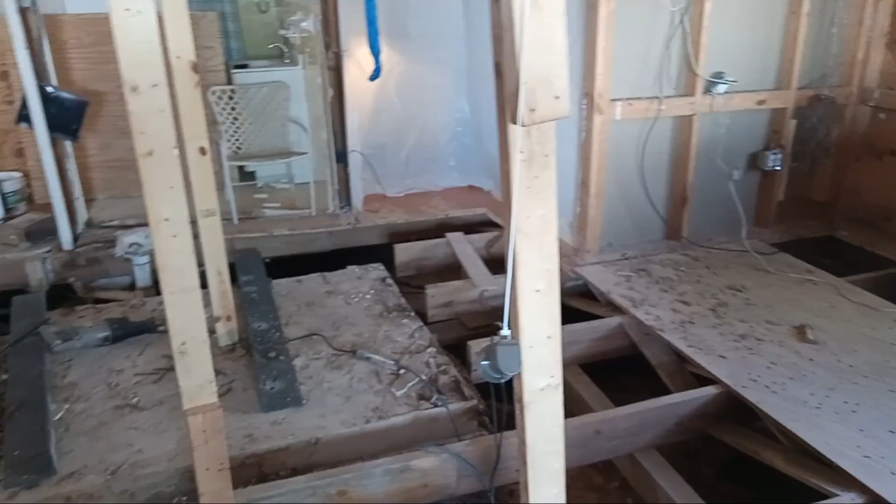All right, so I'm here in this disaster area still, and it's not going to get done until I do it. So come on, Parker, get to work. So I'll be here for 4 days. Yesterday I spent doing yard work because we were gone for so long and there was just a lot of stuff to take care of.

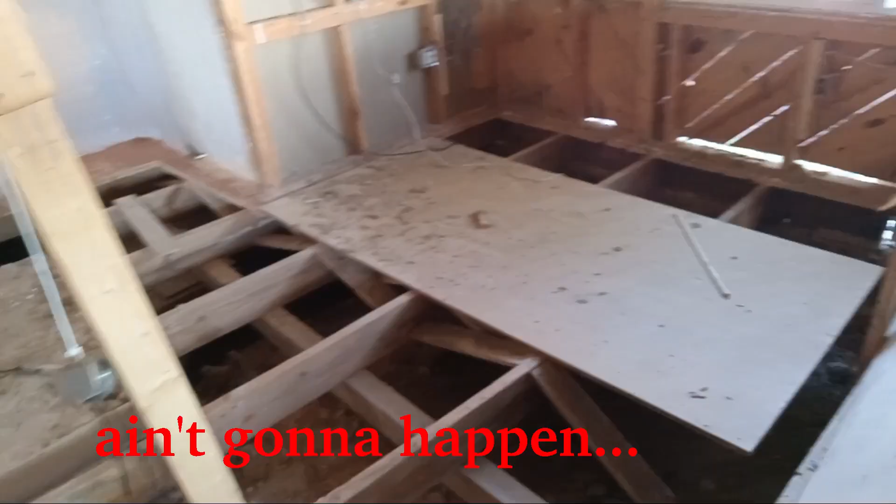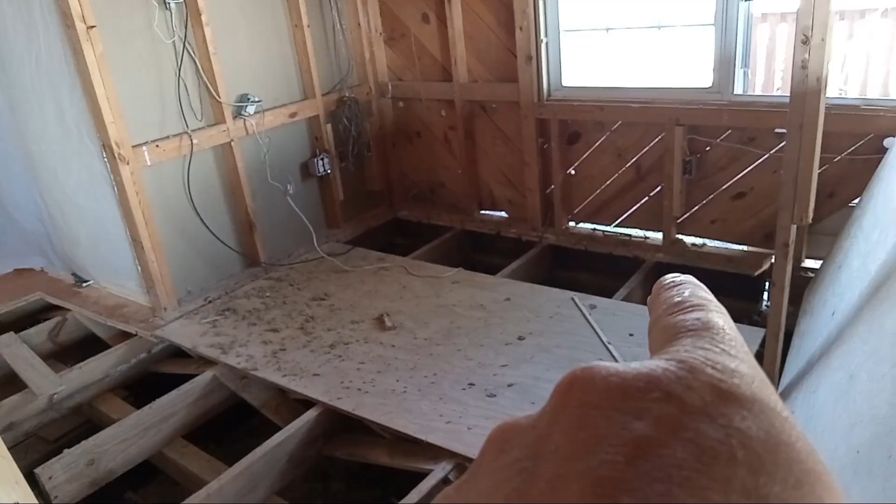So the goal for this week is to get all this structure done and get it inspected. So today I'm going to focus on getting this wall removed. Take out this rim joist and sill. Pour in some concrete, some of the cells, and put in bolts and get that curing overnight.

There's water underneath that part of the bath or the closet. Just FYI, there's also water, tons of water underneath that floor there and in that other floor over there. This is dry, thank goodness, so I can work in there.

After I do that guy, then I've got the short task of jacking up this joist and sticking in some insulation under there, some foam to prevent moisture from coming up through the bricks into the wood. This is not pressure treated sill right here. And then I'll bolt that down, and then those two boards I'll lay against that joist and secure those in place. So that structure will be done.

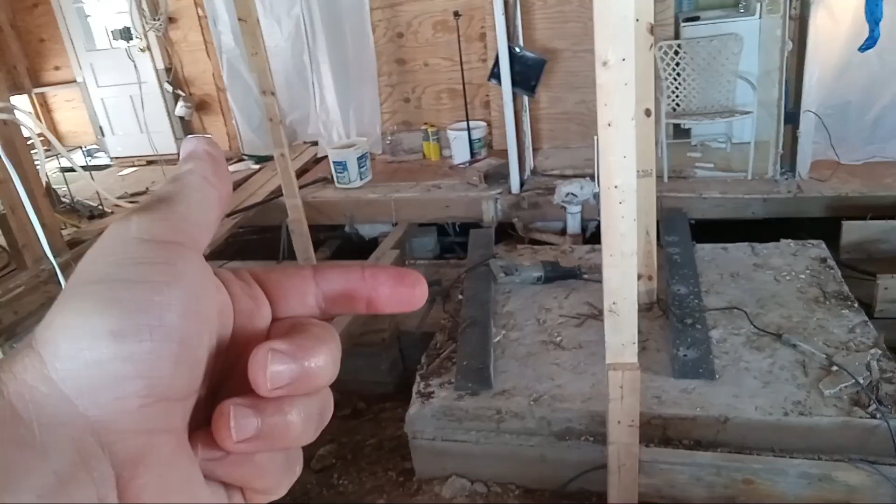Then mounting these L brackets on the side of the chimney. The strategy will be to epoxy them in place and then drill, because the drill is going to wander, and I want to kind of force it into the right location. So I'm just going to epoxy those guys in place and hope that holds just while I'm drilling. And then Simpson Titen bolts go in to hold that. There's 4 on each L bracket.

Then I need to figure out if I need to do any additional pressure plumbing under here. I'm not sure I need to. I can address that when I raise that kitchen floor, because it's mostly under the kitchen floor. But some plumbing needs to go through one of these bays and begin to go up the wall on the outside. So I'll address that.

This job here is probably only a couple hours long. Putting these guys in is probably half a day. And then I've got to let that epoxy cure and drill the holes, bolt that together, and then start laying. And while that epoxy's curing, I can lay some of these joists in here. I can clean up the debris in here, lay joists, and yeah. Then when the epoxy's cured, I can finish all the joists going across, put in the post, put knees around the post, and secure all that. Yeah, and that's it.

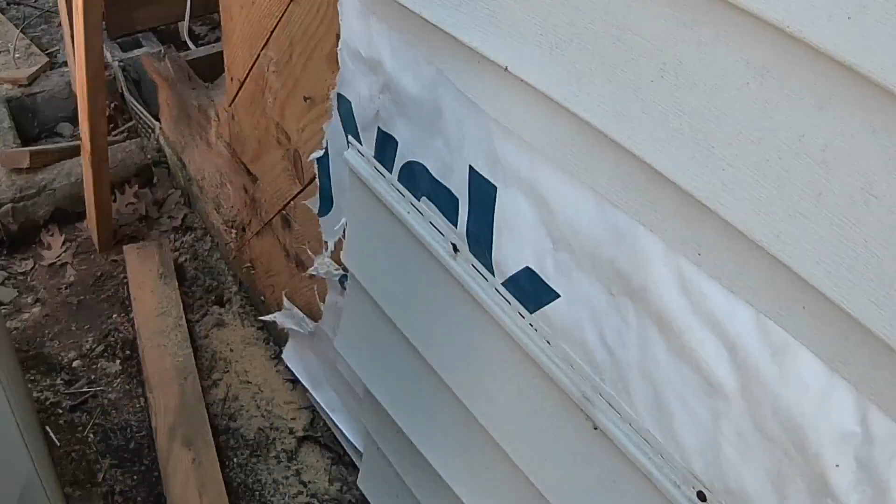I got that part torn apart. I've ordered a new vent to go in there. Should come tomorrow. There was still some termite damage here. So I'm going to tear apart this part all along here for about 6 feet and see how far that termite damage continues.

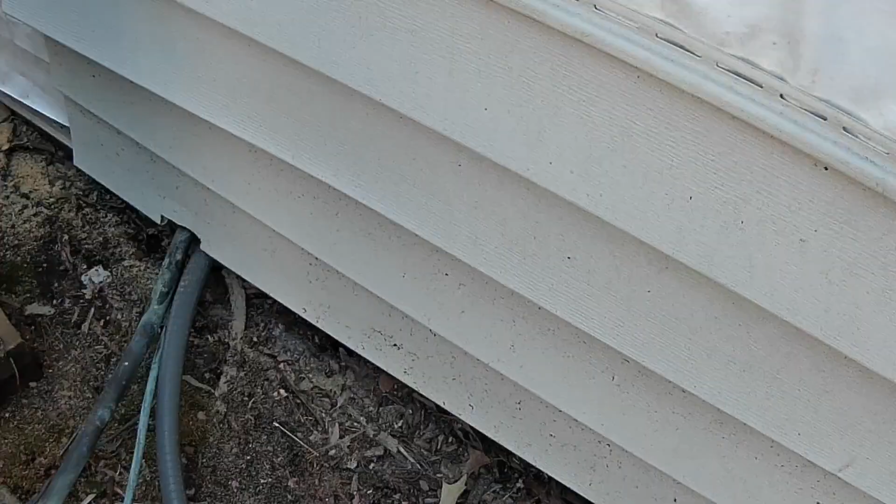I can jack the house up from below, aside from the water that's over in this region in here. I could conceivably eventually replace all of the band boards outside and the sill plates just by jacking up the house 1/8 of an inch, each wall, and then prying out the wood, putting in a new piece of wood. And it's possible. It's a pain in the rear, but you know what, while I'm at it, it'll make the house last for a very long time. So I'm going to see how long this termite damage goes and see what to do.

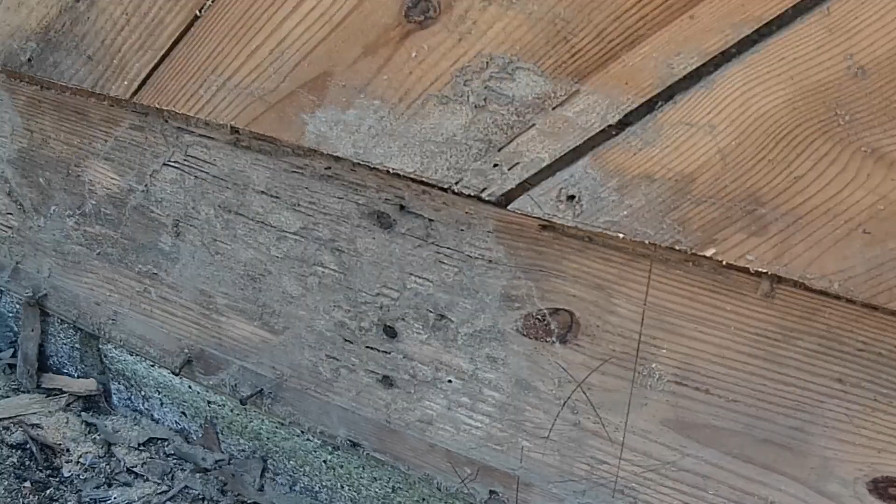All right, so after tearing off some of this sheathing, this area right here actually looks really good, but to the right has some termite damage, and to the left has lots of termite damage going down. So number one, this stuff is dry as a bone, so there's no active termites here. The sill plate, and actually the sill plate going down that way, actually looked pretty good also.

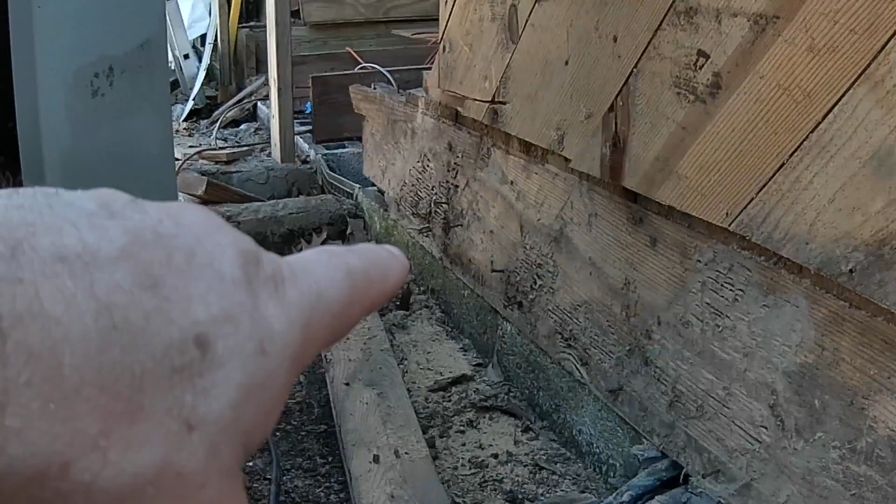It actually didn't have any termites in it, the sill plate. This sill plate here does look like it's got some termite damage, but over here it doesn't. And now, of course, termites will stop short of the surface of the wood, usually. But in this case, there's a little bit of a ledge here, and they still ate to the surface. So, anyway.

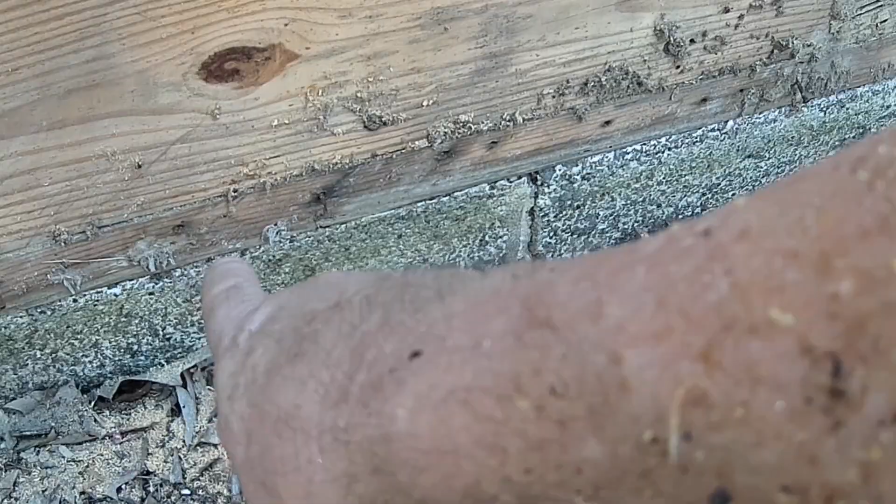So because this is dry as a bone, and I'm going to be sealing it up, I'm going to be jacking up the joist a little bit so I can shove some foam under here. Not spray foam, but foam that's meant to go under a sill plate. Roll foam.

I'm going to cut the band joist here and the sill there, and I'm going to replace all that with pressure treated, and this with pressure treated. This joist right here is going to remain, and so is that one, and the one down there at the end of this hole, that remains.

So I'll remove the nails here and cut down the middle of the band board here, and then pry it out. Cut here, take out the sill, and then I'll pour a couple cells worth of concrete in here with bolts, and I'm gonna maybe call that a day, because I can't do anything with the bolts until they harden. So anyway, we'll see how that goes.

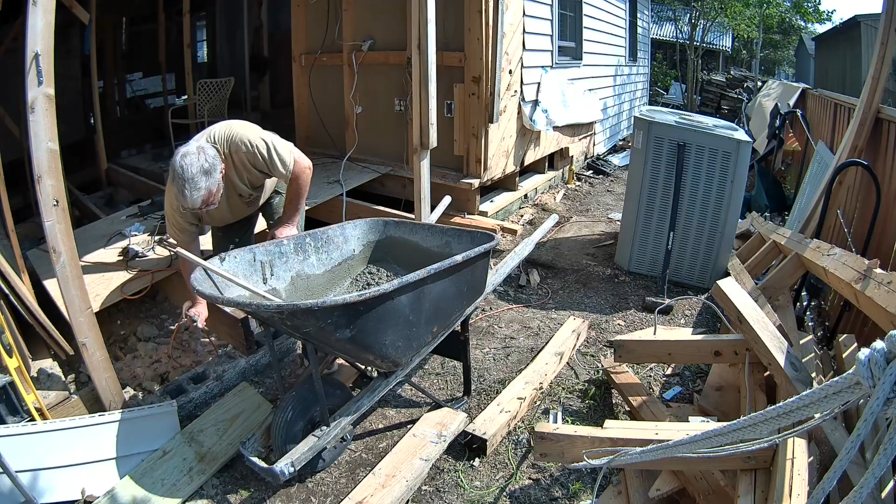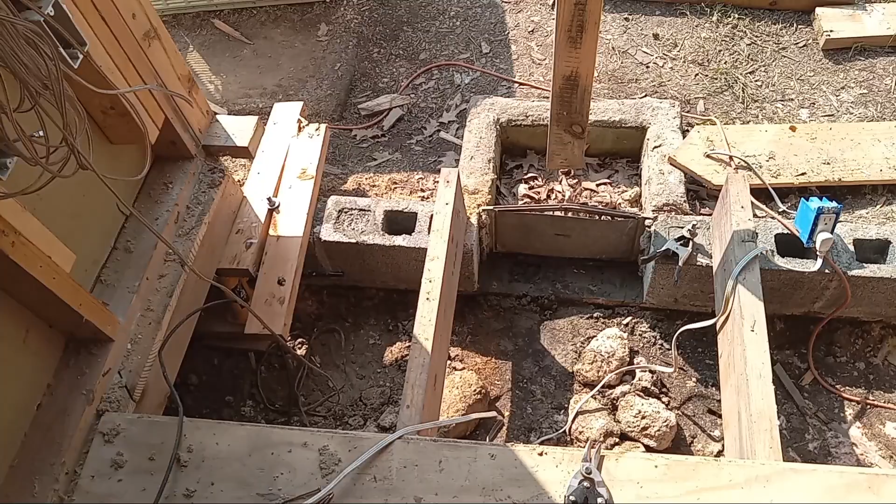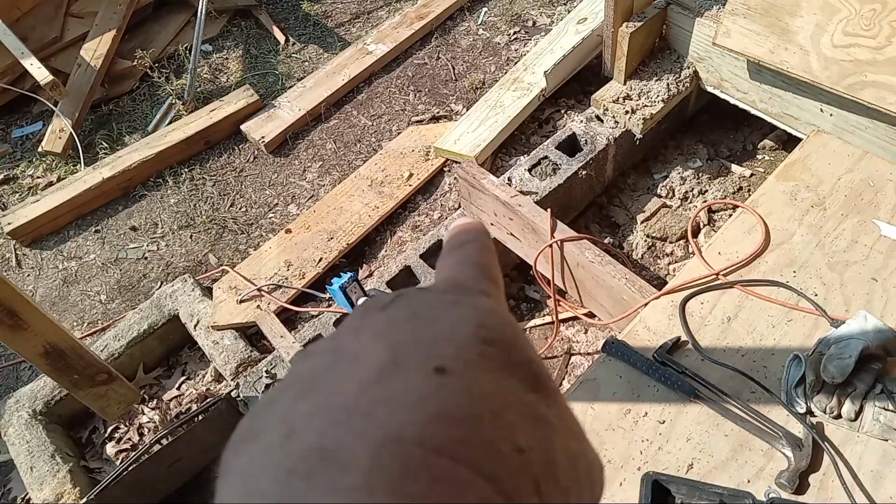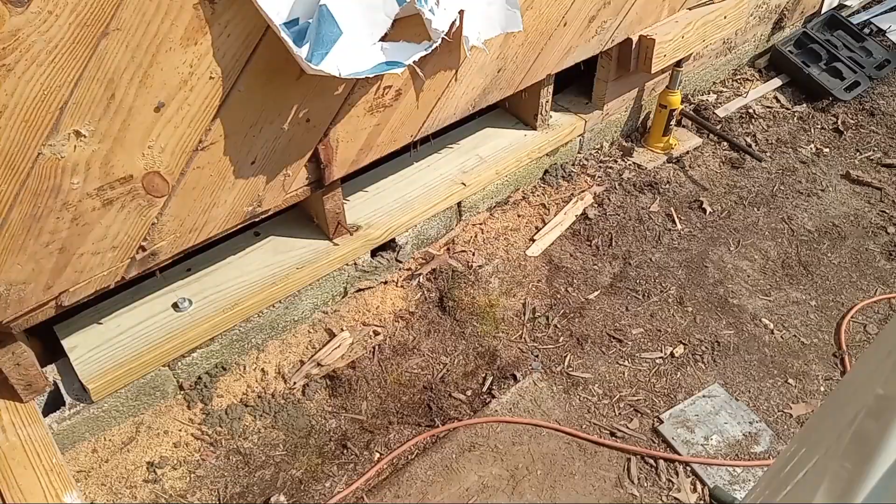So in this case, I don't feel so bad. I didn't put a foam pad under it because I've got these existing joists here that are pressing down. I didn't want to risk screwing it up and not doing a good job. So it's pressure treated. The non-pressure treated sills that I pulled up didn't show any water damage or rot or anything like that underneath. You couldn't even see where the sills were. So I'm confident that these aren't going to rot based on moisture.

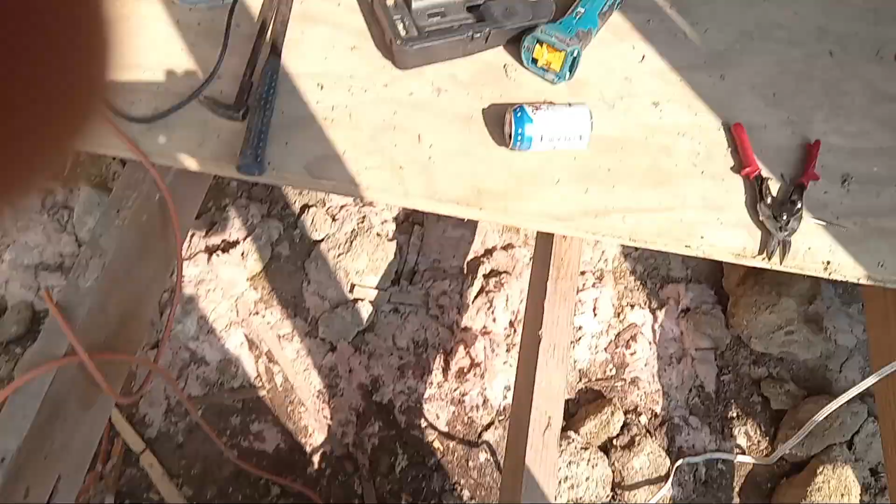So yeah, next step is to clean this crap up and start cleaning out the debris from the crawl space. Tomorrow, I'm supposed to receive another vent here. I'll put that in and then put the sill plate down, put in band boards, and then start putting in joists. Yeah, I can't put in joists until I put in the brackets. But that'll be tomorrow, hopefully.

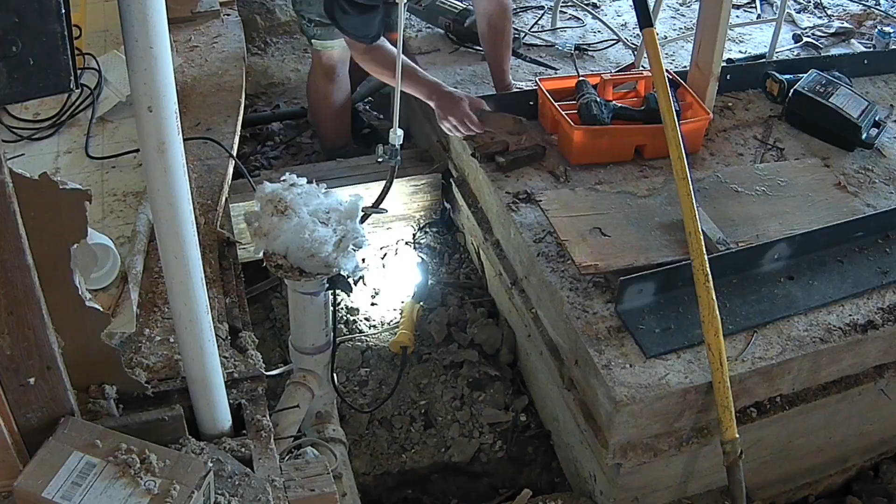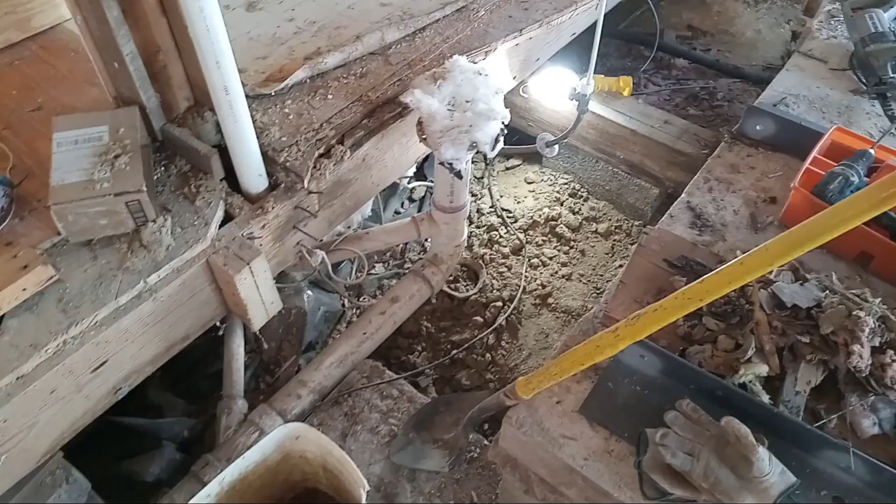All right, so last night I had an aha moment that I forgot to consider the toilet drain. The toilet drain needs to slide that way, at least an inch or 2, to be 15 inches from the finished wall. Which means I have to cut and refit this structure here and the vent. This vent can't be here because that's where the electrical panel goes. So the vent is going to move to the wall of the bathroom facing the river.

And so I've got to lay out on the floor. I've got to put some plywood here so that I can exactly measure where the ends of the beams are. That dictates where the wall goes, or the wall bumps out a little bit if the ends of the beams are too far toward the street, etc. So I've got to do some lofting.

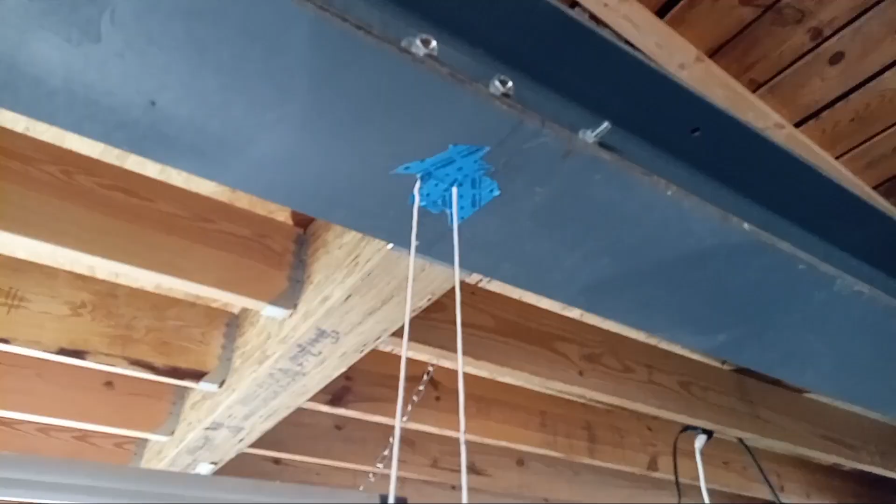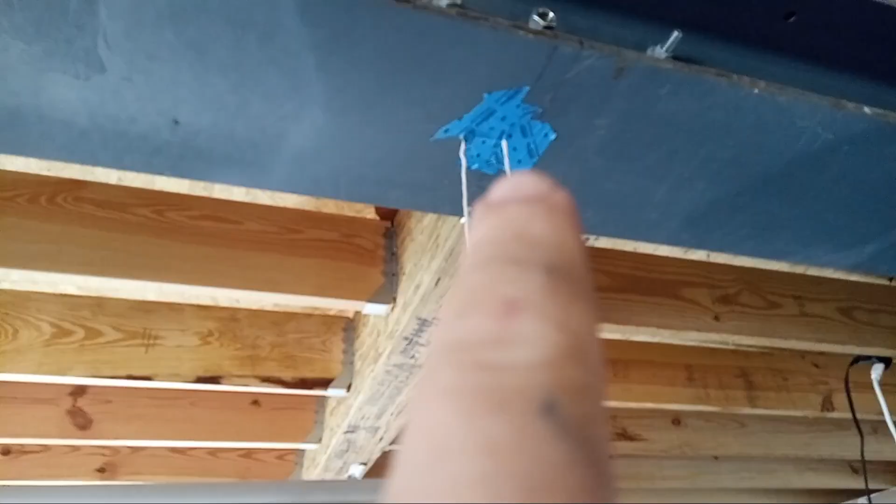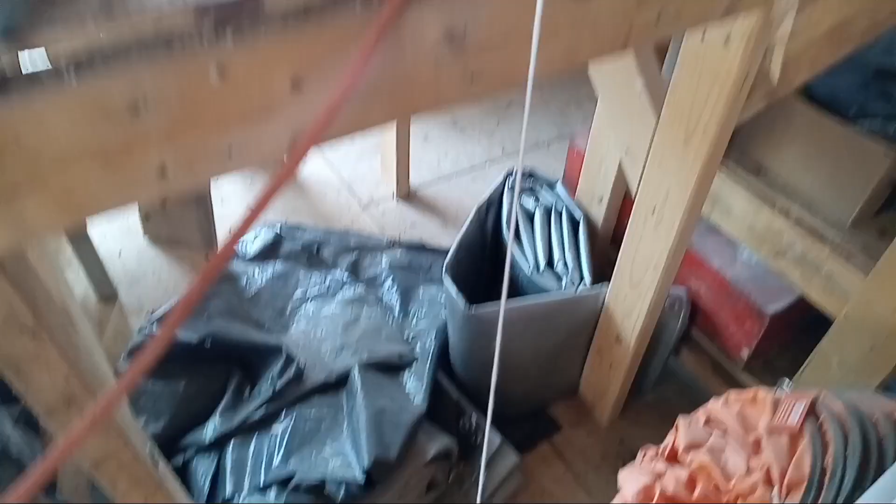So to measure where the base of the post sits on the floor near the bathroom, I've got a makeshift plumb bob hanging from the center of the beam going toward the street, and 3/16 over from the center line of this beam, which is the thickness of the webbing. And then this goes down to my makeshift plumb bob, which is a needle file, and the beam is 16 feet 1 1/4 long. So that's going over there.

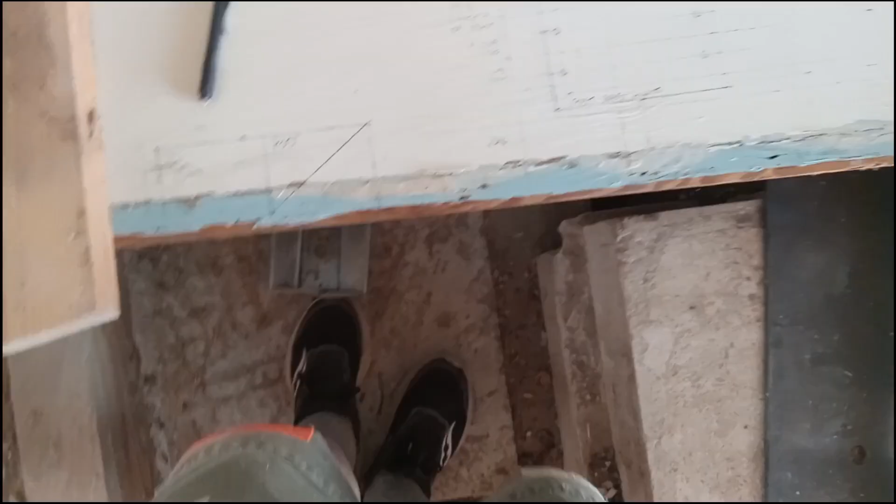All right, folks, I think I've drawn out or lofted all of this floor area here for the bathroom and the structure and the center post. So this is where the center post stands to go to the ridge beam for the roof.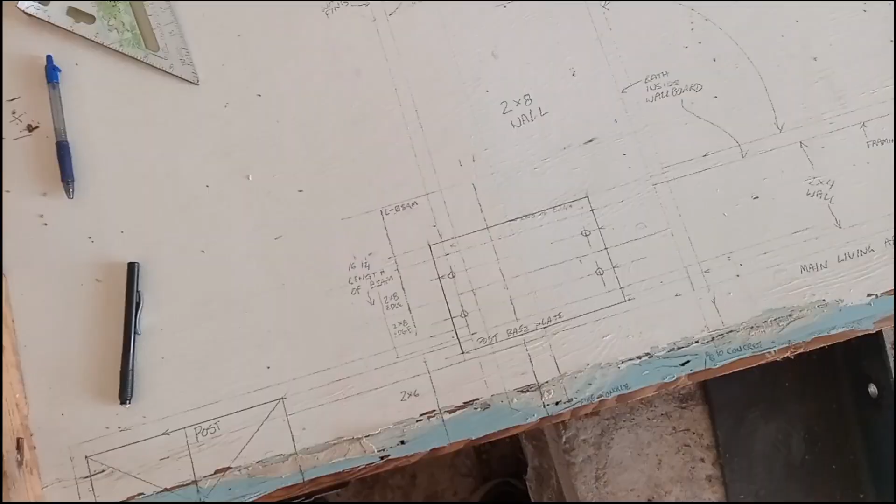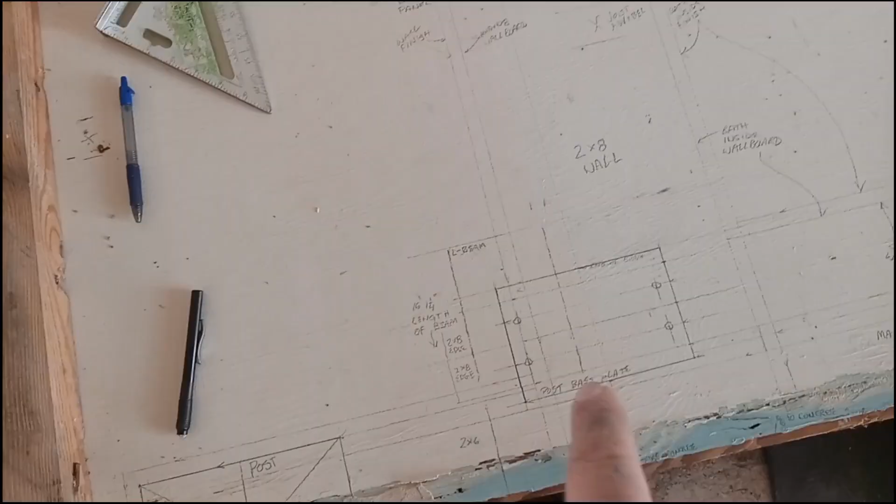This rectangle here represents the base of the post that supports one of the beams going toward the street. And because I'm going to keep this right hand edge of the wall and carry it over, and then based on where the post goes, that means this wall right here is basically going to be a 2x8 wall, which is fine because it only goes from here to the door, or a little shy of the door. So we'll have a little bump out there.

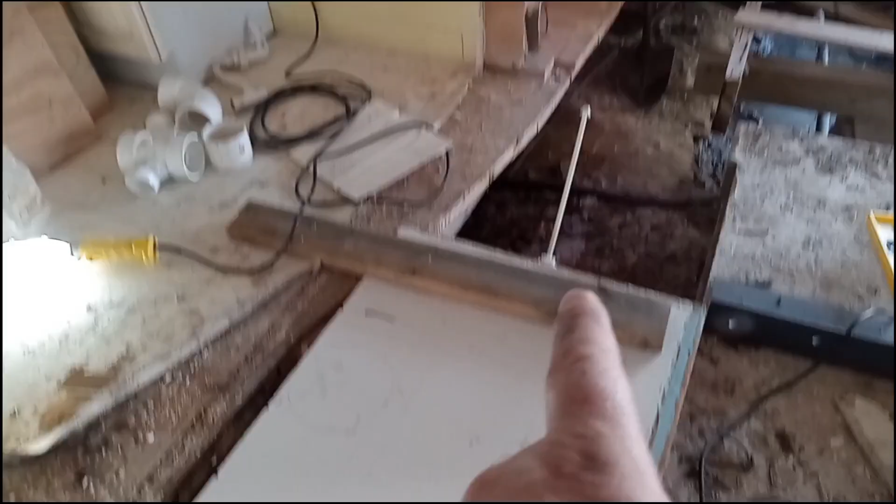That's fine. The vent for the toilet is going to come up there in this area where it came up before, because that's really the only, I can either put it there or I could put it in this wall right here. I can't put it along this wall because the 2x8 that the posts are resting on is going under here, so I can't interrupt that beam.

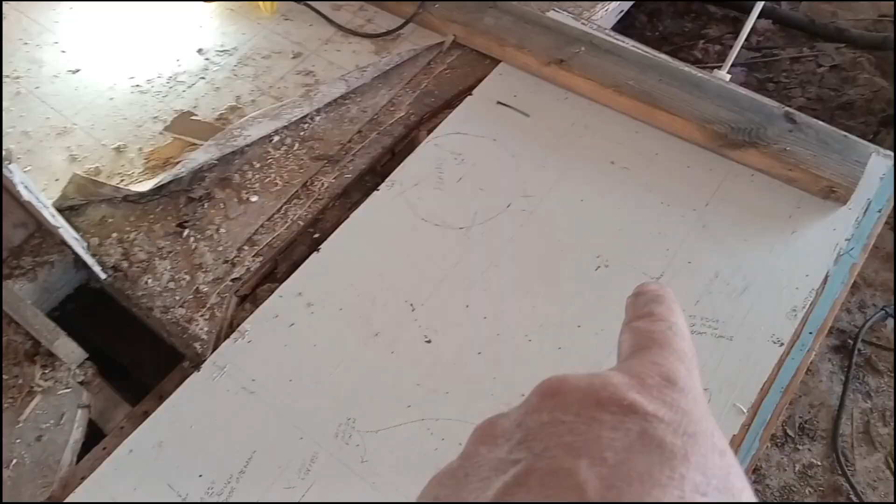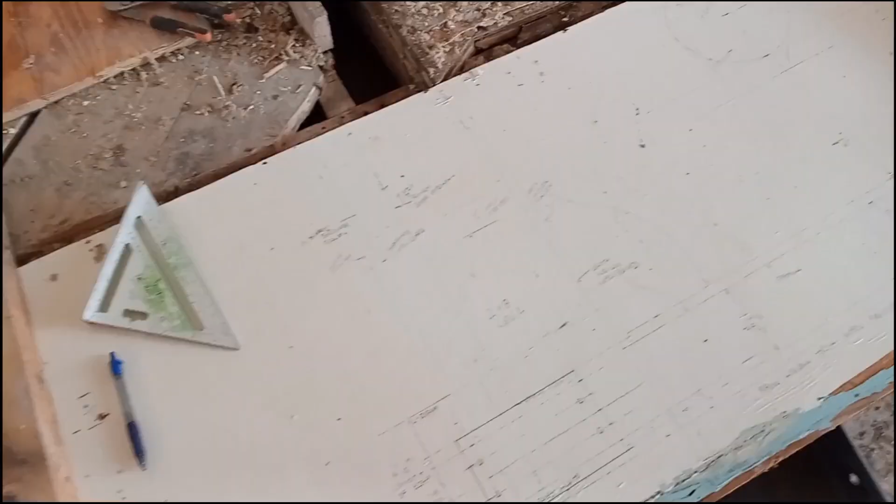Toilet flange is located there, which is 12.5 inches. It's only required to be 12, but I made it 12.5 inches to account for some error in the wall sheathing here. And then I made it 16 inches from this finished surface, just to give a little bit of extra room. Again, for error. I'm going to have to locate this off of this joist here and a mark I put on the joist. So I have to replumb that. I guess I'll do that today.

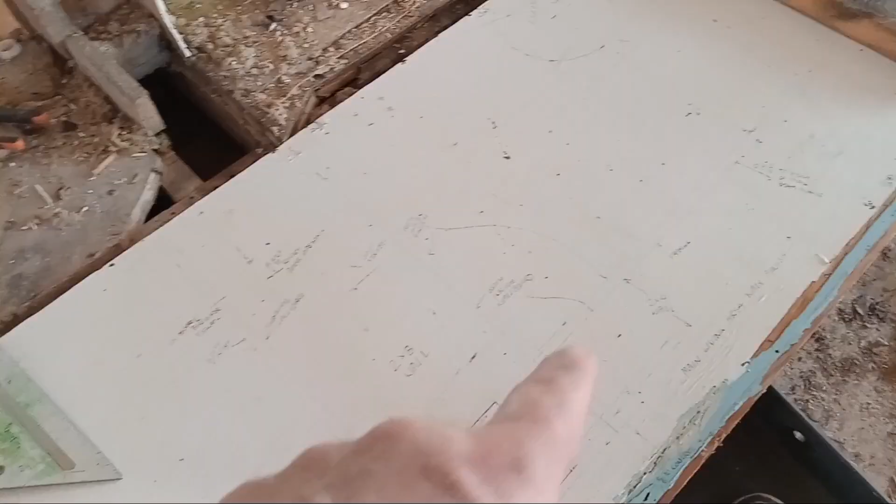So this is a 2x8 wall, and this will be a 2x6 wall because this post is 5.25. So this ends up being a 2x4 wall. This is a 2x8 wall, and then there's a little strip of 2x6 wall that goes from the end, this side of the post, over to somewhere in this region, just to encompass this ridge beam post.

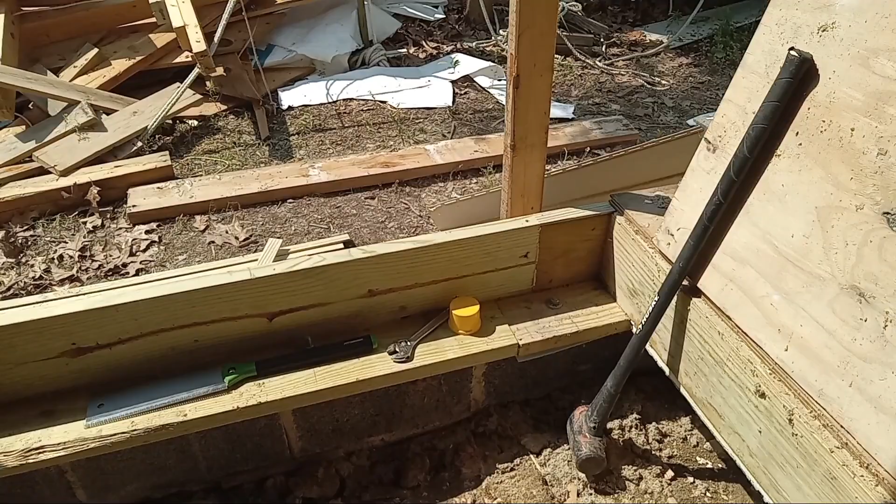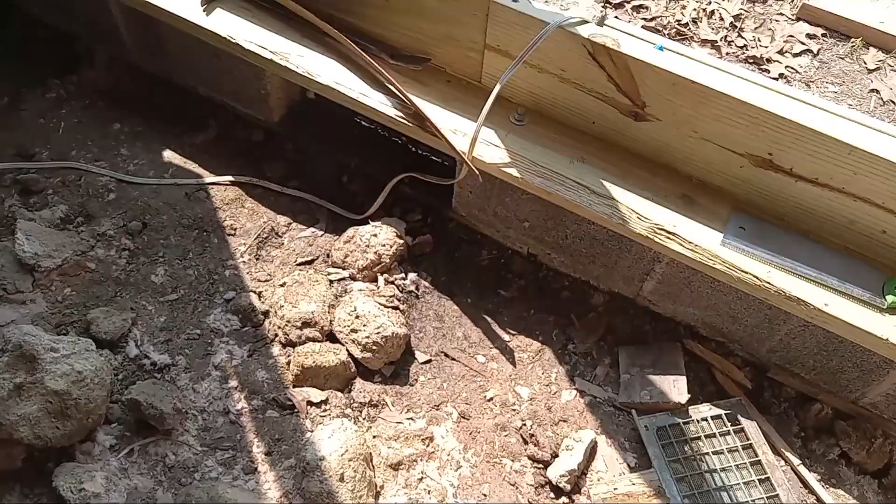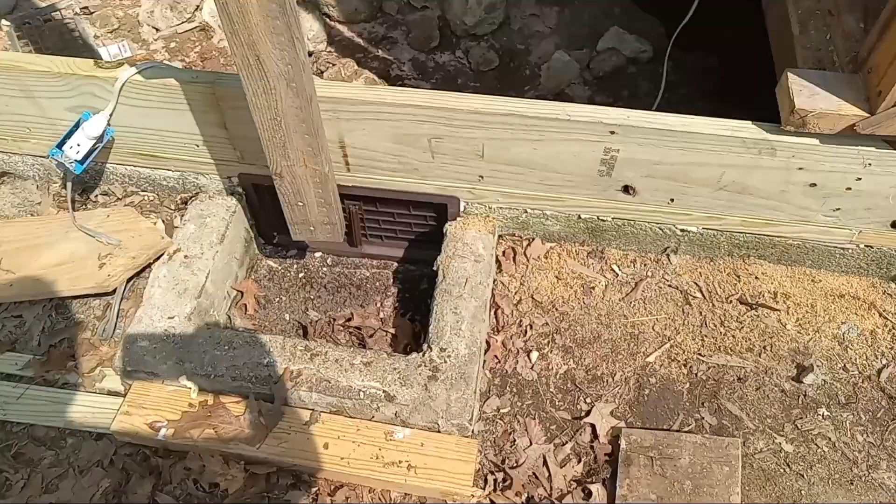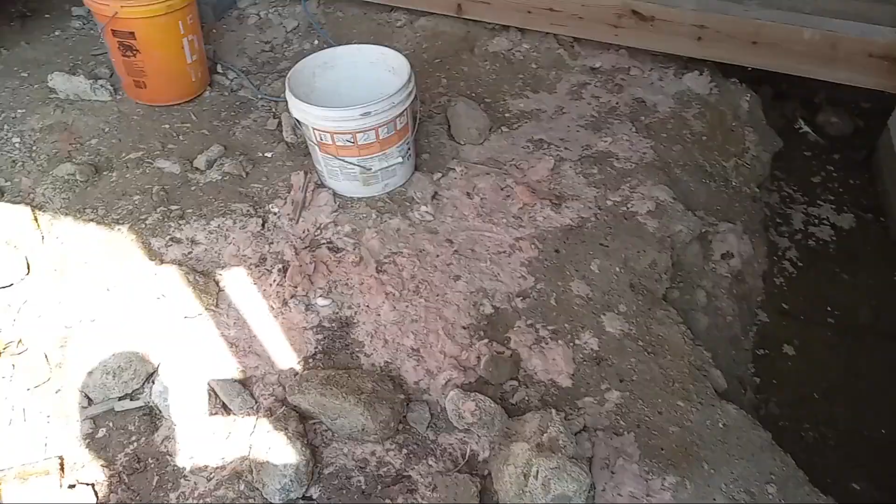All right, folks. So I got the sill plate and the rim joist in. Squirt stuff with Great Stuff and put in a new vent just to have something a little more functional. And yeah, so I screwed everything together, and now it's time for plumbing. I've been trying to procrastinate on this as long as I possibly could, but that's really the next thing I have to do.

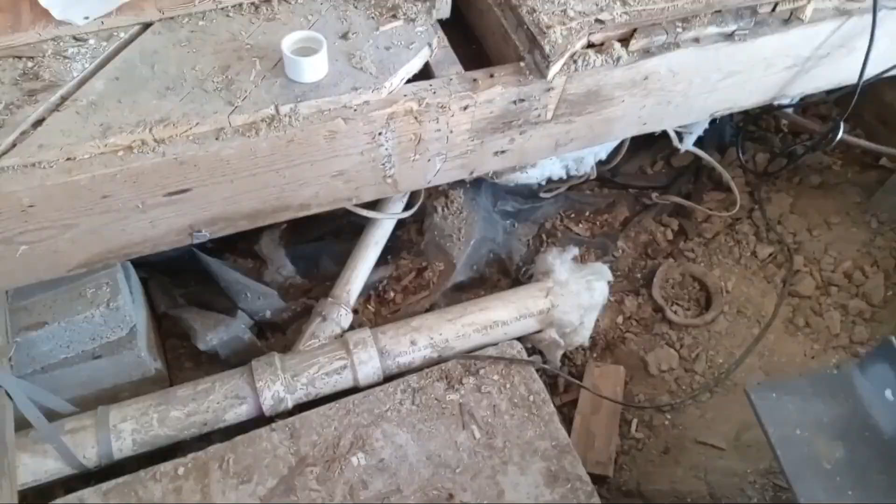So this drain for the toilet, after I did my lofting, the drain, that's the center line of the new drain location. Shift it over. And so, however, this needs to go over that way, toward the street, about 2 or 3 inches. And there's just not enough flex here in the system.

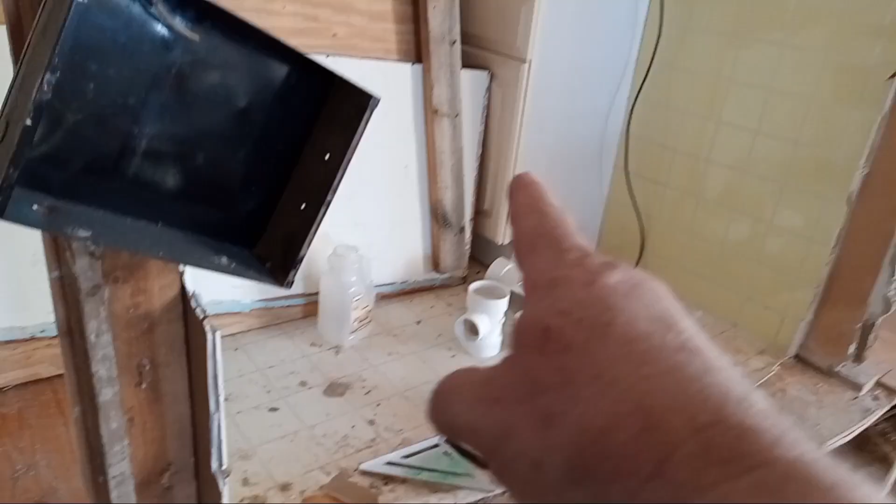This is the drain for the vanity right here. And it goes through a joist, so it can't flex this way much. And of course it can't move this way much. So in order for me to push this guy over, I'm going to need to cut a section out of here and put a junction in. So that's what I'm going to try now.

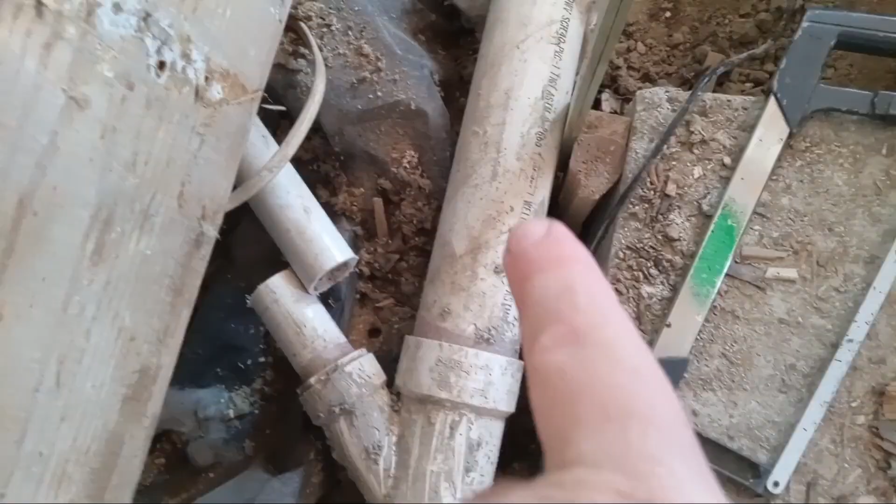All right, so with the main pipe here in a position from the joist that I want it, spaced off horizontally using a vertical reference, we got about an inch and a quarter pipe difference, so I'm going to go ahead and cut that and glue that up.

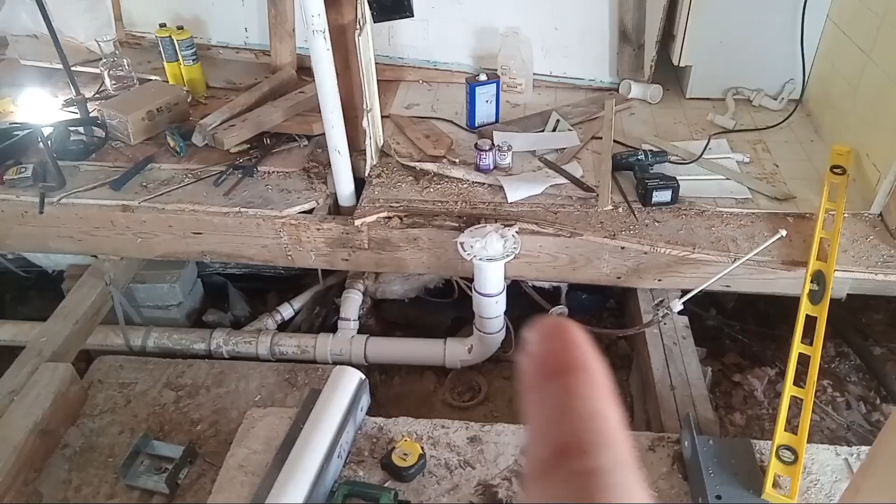All right, I finally got the toilet drain plumbed in. Everything lined up where I wanted it to go, except it's a half an inch closer that way than I intended. But that's why I added an inch of slack. So now it'll be 15 and a half inches from the wall, which is within code. So I'm happy about that.

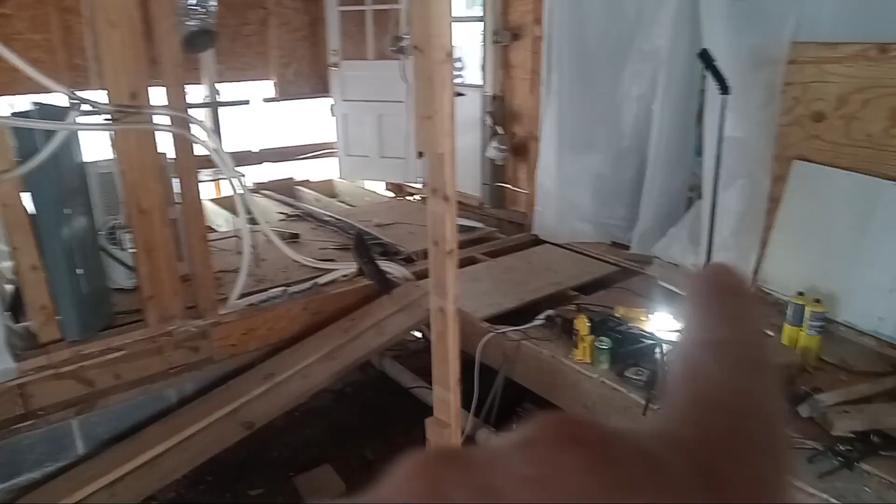Next, I need to tackle the pressure plumbing that goes under. I'm just going to run PEX lines that go under in that bay and then pop up so that we have pressure lines that lead into this space right here, because I'm going to be tearing the rest of this floor up later. But I want to be able to insulate that bay.

And so with the pressure lines there, the inspector can see how they come out of the insulation and across. So before I put the plywood down, after that insulation inspection. So